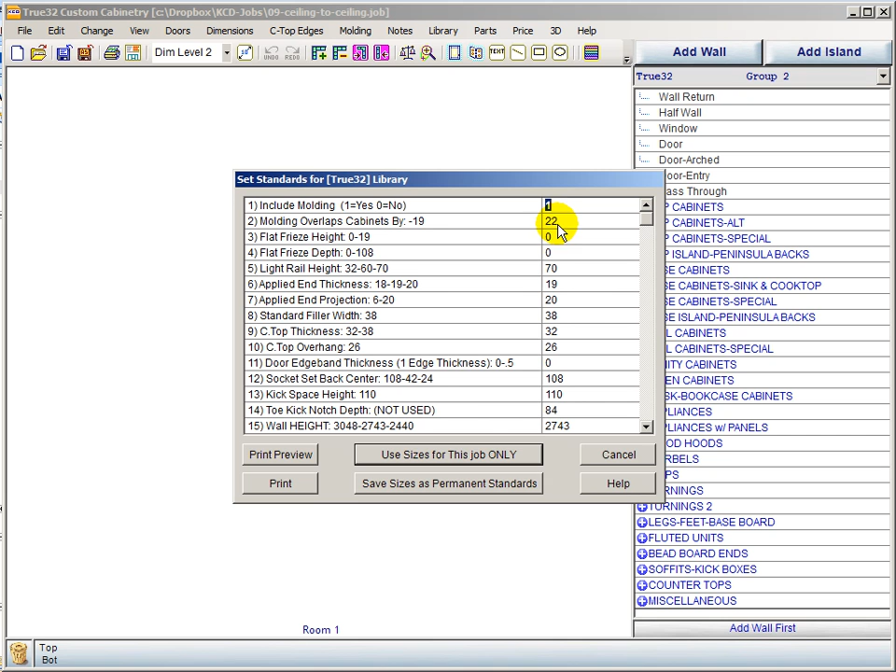And you see here our flat frieze entries are zeroed out, and if we scroll down to our reveals, we'll see that we have that set to 67 for this 9-foot ceiling height. 67 is appropriate for the size of crown mold we would use in that application. When we go to 10 foot, we have to bump it up to 99 to be able to accommodate a 5¼ inch crown, if you want to use a larger crown anyway.

So that's what we've achieved by opening the quick start job, is we already have the startup standards and moldings selected. At this point, ideally you would rename this job. I'm not going to save it, so I don't need to, but if you were actually starting a job, you'd want to rename that. So I'm going to draw a wall similar to what we did last time and kind of duplicate what we did with the other video tutorial on the quick start job.

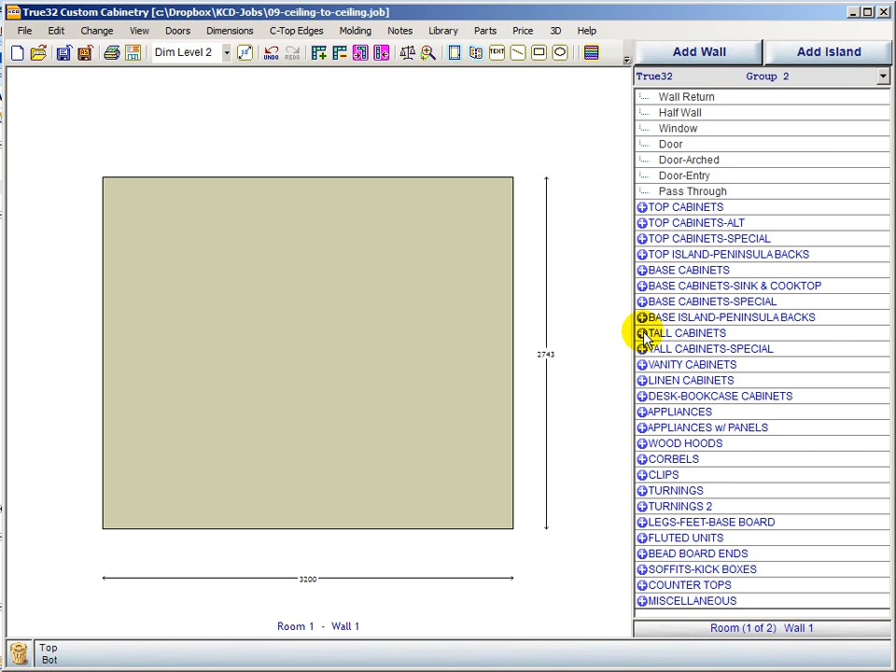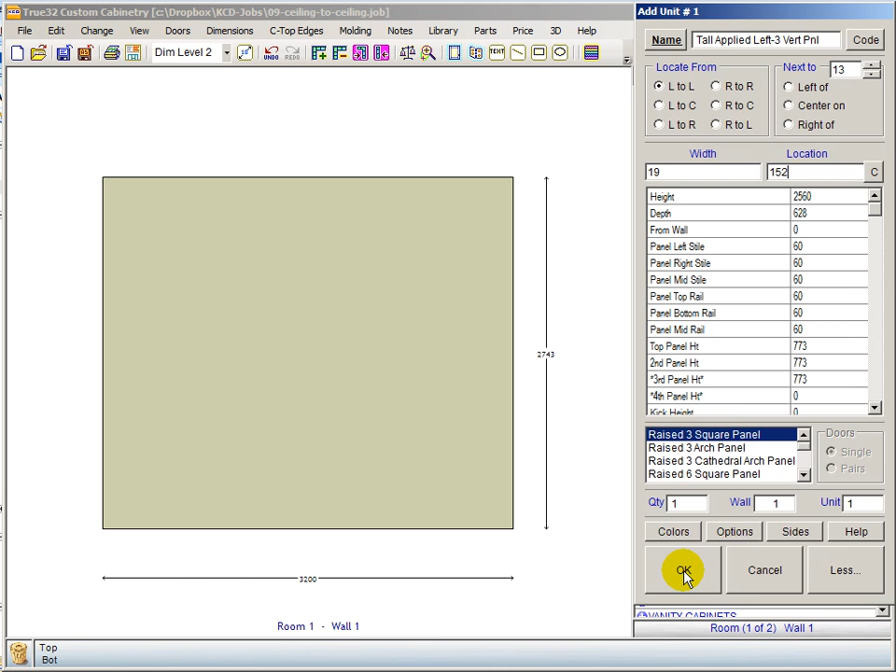I'm going to come down to the tall cabinet group, and I'm going to choose tall applied left 3 vertical panel, and this time I'm going to say this is about 152 millimeters from the corner, just because depending on how big this crown mold is, it may not have something to return to if I don't make that space big enough. I'll be able to tell as soon as I drop it. And I had plenty of room to even stay back at 128. This is probably a 4¼ inch crown, face mount type crown here.

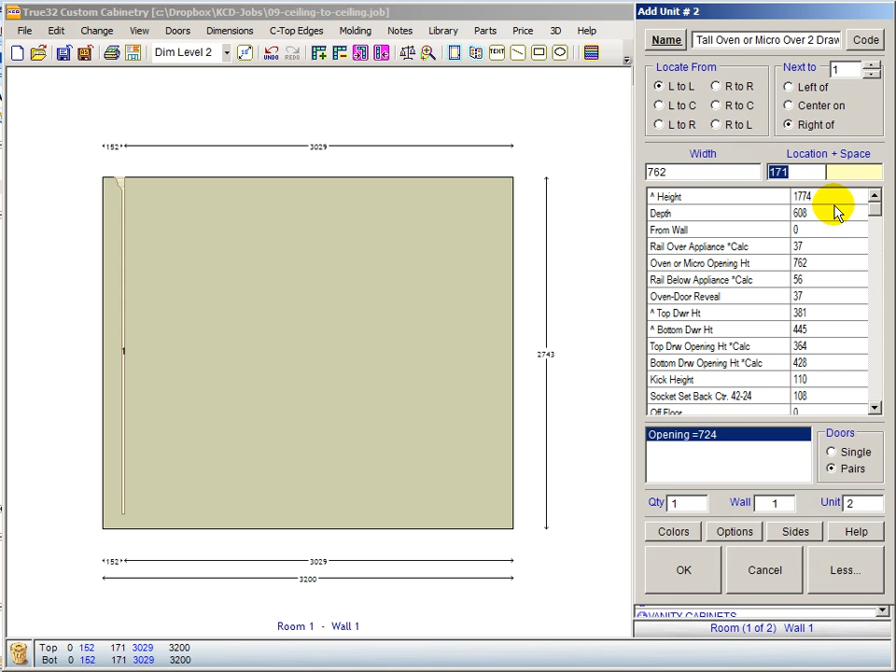Then we'll go get our oven cabinet, and this time I'll grab one of the new single oven cabinets, right of 1. We'll go ahead and convert those drawers. And then we'll get our top oven cabinet. I could have said centered on 2, but I said right of 1. And again, you see the cabinets are automatically positioned height-wise at the proper height.

So the position and the height is determined by those startup standards of this bottom unit being 1764 or 1774. If you change this height for this unit in the startup standards, then it changes automatically the height of the upper cabinet. It just always will be right if you go ahead and take the time to set it up initially. So let's go ahead and put our other applied end on here, applied end right, and that is going to be right of 3.

And now I'm going to zoom in, not too tight because I want you to be able to see the things around it, but you see a gap up here above this cabinet. And if we turn the moldings off, one of the new options in KCD now allows us to just toggle the molding off, you see that my cabinet is going up that additional 67 millimeters above my doors. My hinges are positioned appropriately in the CNC world because of associative machining.

In the manual world, you're going to have a jig to position that hinge, but the hinge is still going to be bored equal distances from the top and bottom of the door, and you're just going to use different holes to position it. Your jig will have to accommodate for your frieze to position your hinge plates.

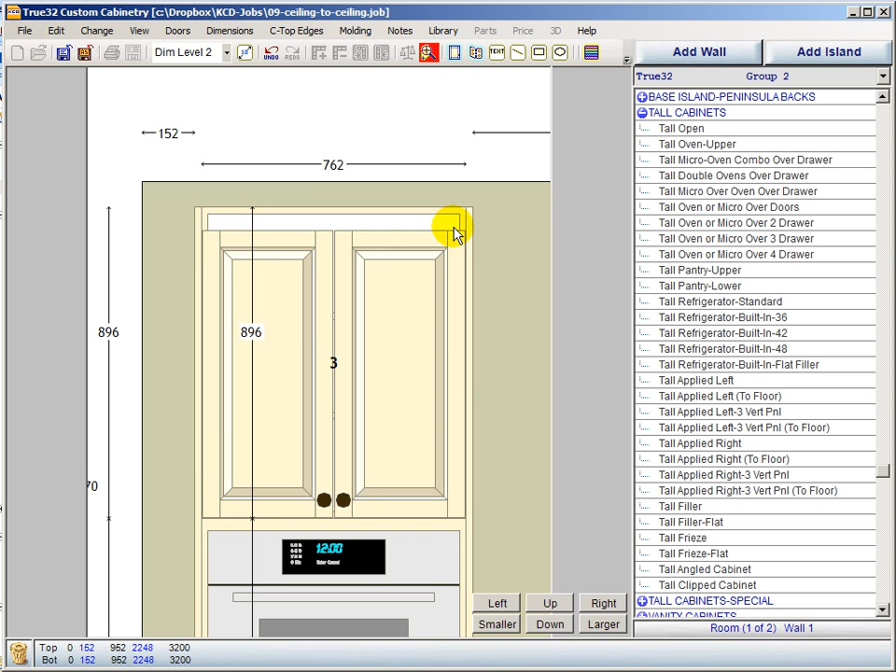You see we have this gap. Just so this shows well, I'm going to go ahead and turn the molding back on. And I'm going to come down here. As long as I'm in the same tall group, my tall frieze, and this is vertical versus flat. This one right here is flat. This one here would be vertical frieze. So I'm going to say I want tall frieze.

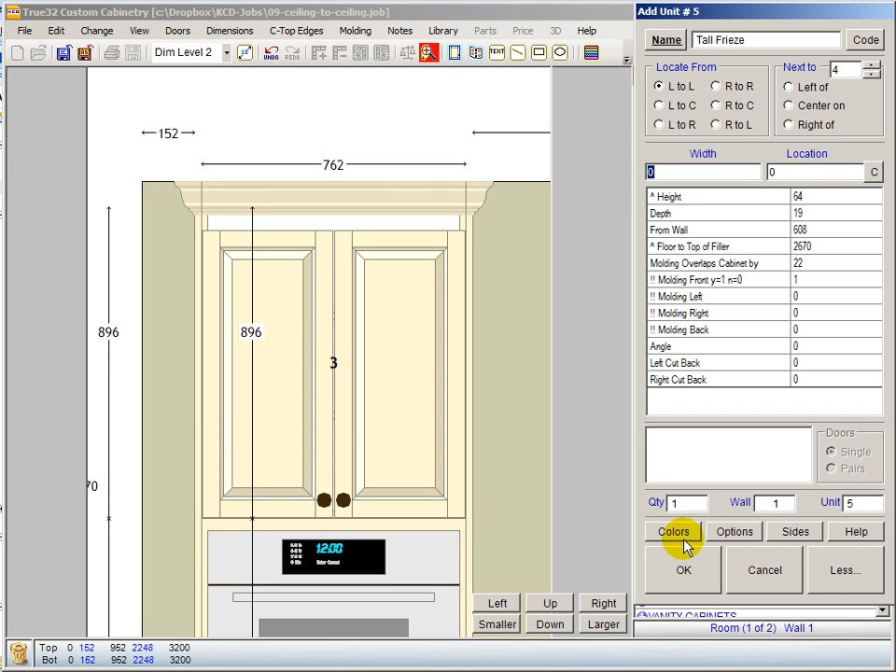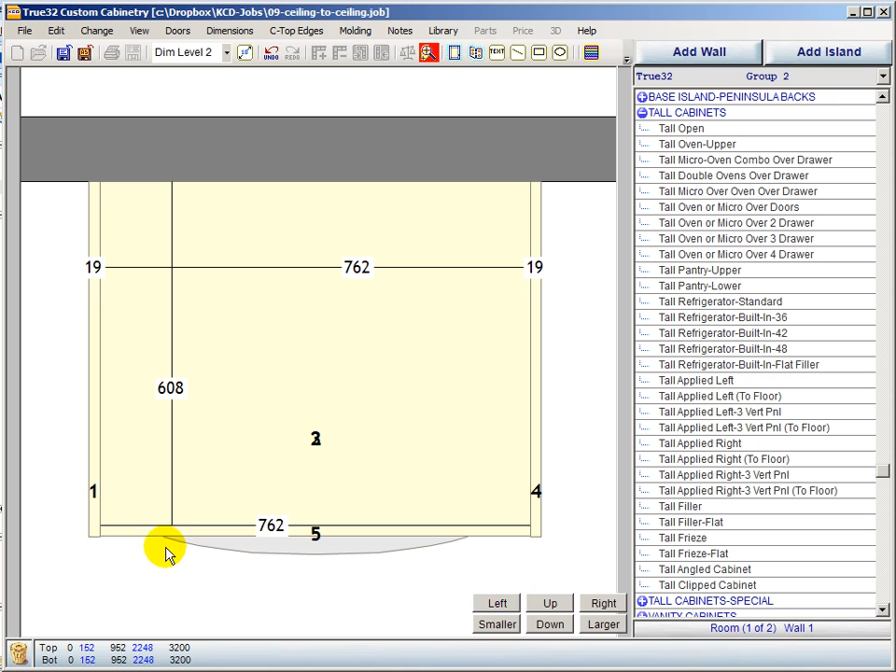It's 762 millimeters wide. And I'm going to say left of 4, which was that last applied end we set. And now you see that all the crown molding lines go away and it fills it in. If we look in from the top and zoom in, we have a vertical frieze flush to the front of the applied ends. And then when we look at it from face, it's filled in that gap. And now we have something.

If we turn the moldings off, you can see that we're not going all the way to the ceiling. We're staying off the ceiling some, and this is for True 32 guys specifically so we can use our suspension blocks effectively. And also the ceilings could be out. So this is a very effective way of dealing with this application. So I'm going to turn my moldings back on

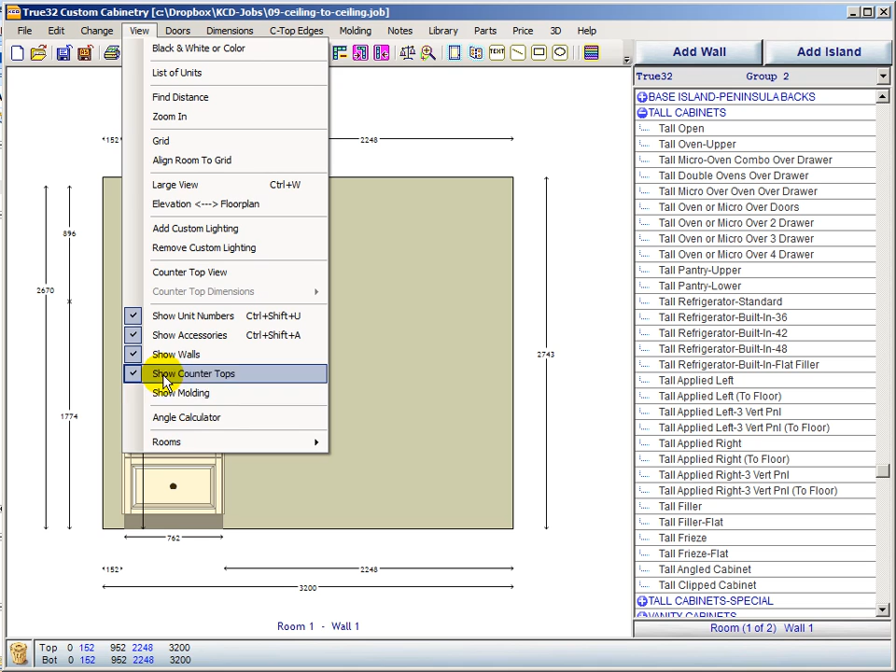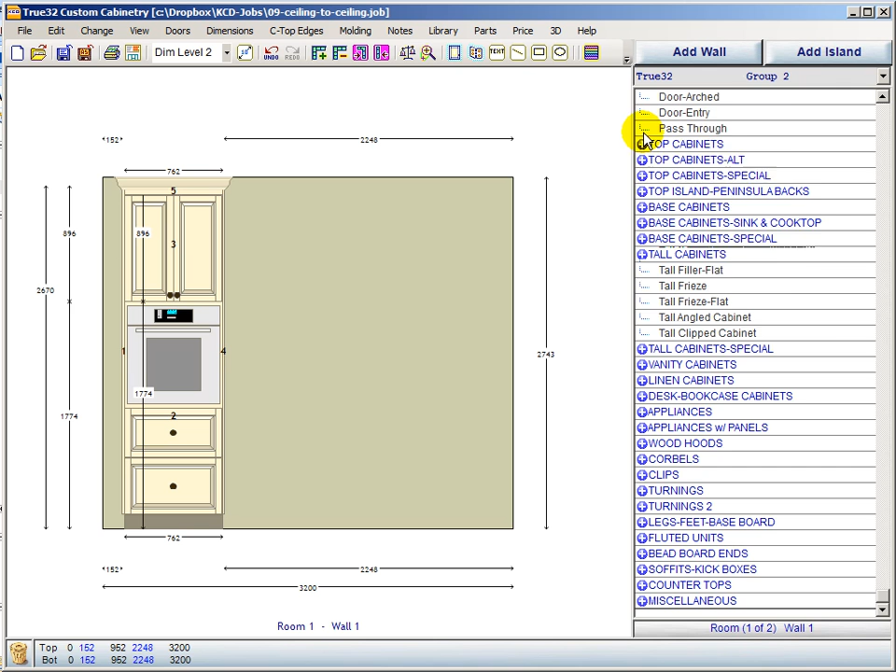and kind of move along here again, showing how these different groups also work as we did last time. Last time we were illustrating the staggered cabinets. This time we're to the ceiling, so we'll see that we can also have these alternate depths but not alternate heights. So we're going to go to our top cabinet group, and we're going to say we've got just a 762 millimeter traditional top cabinet, and it is right of 4.

And while we're in this group, we want to go ahead and grab our light rail and frieze. So we'll say that's 762 centered on 6, and then we'll go ahead and grab our frieze, and it's also 762, and it is centered on 7. And then we'll go to our top alternate group, and this is going to give us a different depth cabinet. In this case, that typical top cabinet will be fine.

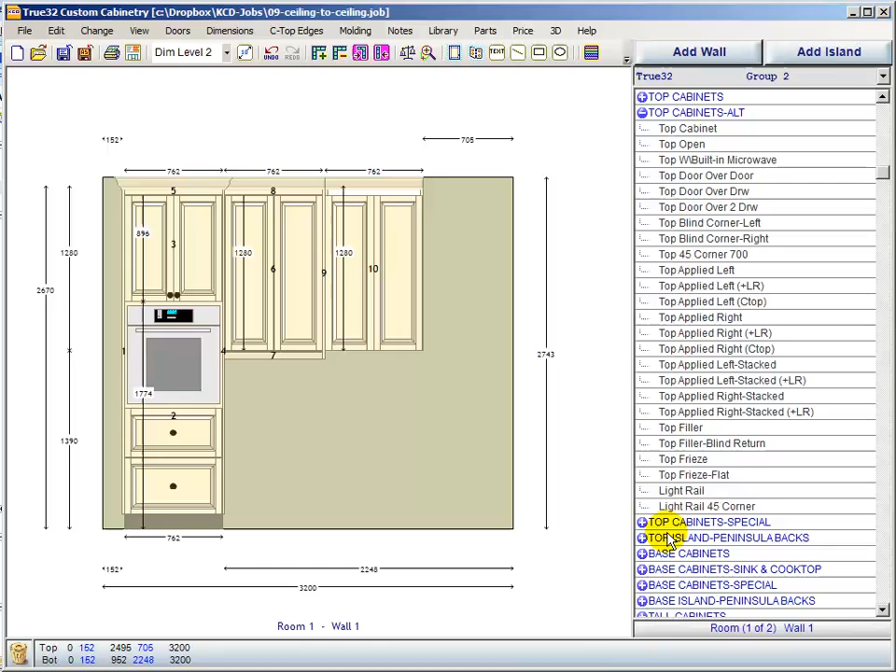So we're going to grab a top applied left plus light rail, and we'll say that that is right of the 8 piece of frieze, and then we'll say we've got a top cabinet that's 762 and it's right of 9, and then we'll say we have an applied end right plus light rail that is raised panel, and it is right of 10, and then we'll grab our light rail, and it is 762 left of 11,

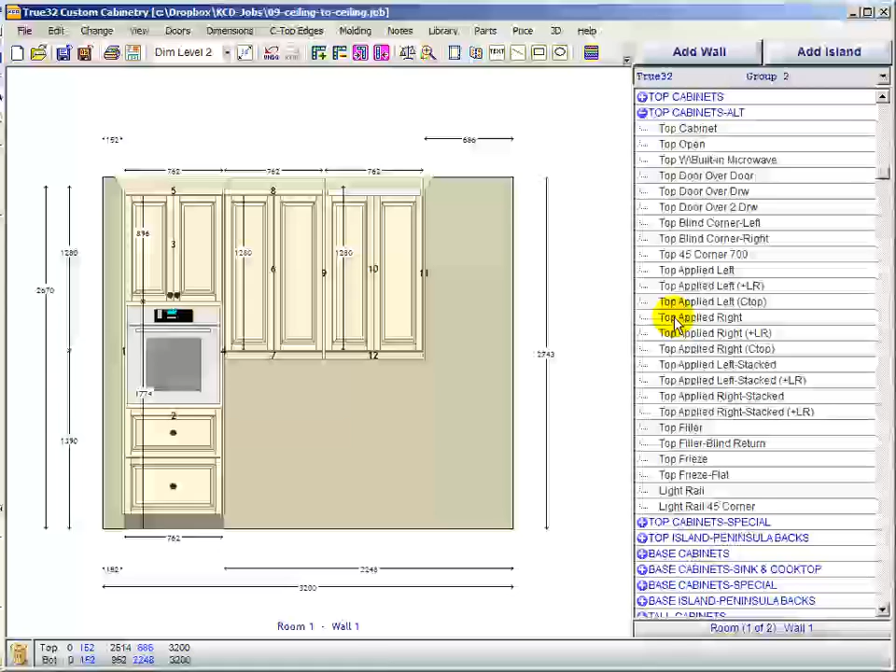and then we'll grab, and this is the appropriate depth. This cabinet is deeper, and this is at the appropriate depth, as will be this frieze, because we're coming from the same group. So we'll say that's 762, and it is centered on 12, which was the light rail we dropped earlier. So now if we look at this from overhead, you see we have a deeper cabinet, deeper applied ends.

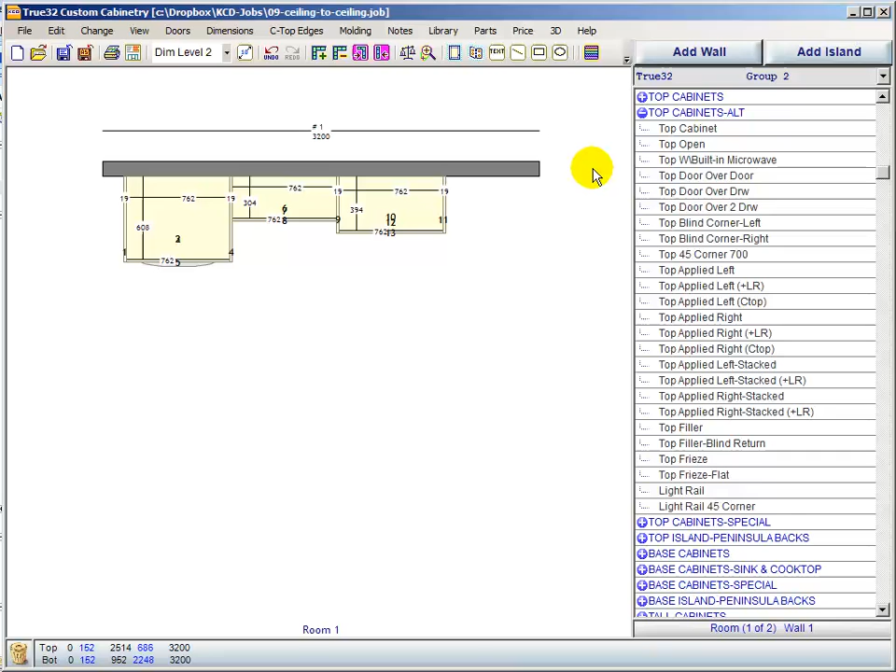Everything is aligning based on those startup standards to work with this cabinet being deeper than this cabinet, but all the frieze positioning properly, being at the right height top to bottom, being at the right depth front to back. That's the point of these quick start jobs, is they bring you to or preset your startup standards for something other than your one initial startup standards.

So if you have varying jobs, and in this case, our varying jobs are 3 versions of an 8-foot ceiling, 3 versions of a 9-foot ceiling, and 4 versions for a 10-foot ceiling. And you could have as many of them as you want. All you got to do is create a quick job and set all the standards and save that job with an appropriate name. It'll tell you that's what you want to do the next time, and you'll have that set up. So that's how the quick start job for going to the ceiling works.

That's how our frieze works, and I hope that was helpful.